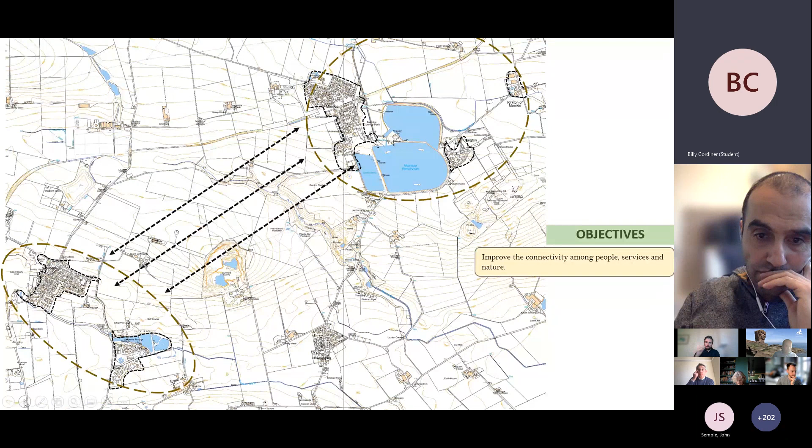Sam's already run through this slide, so our objectives were to improve the connectivity, enhance the relationship with the blue and green environments, improve sustainability of the villages with development and densification strategies, improve sustainability and resilience through the use of solar power, and reduce the monotony you get with developments to try and encourage a range of developers.

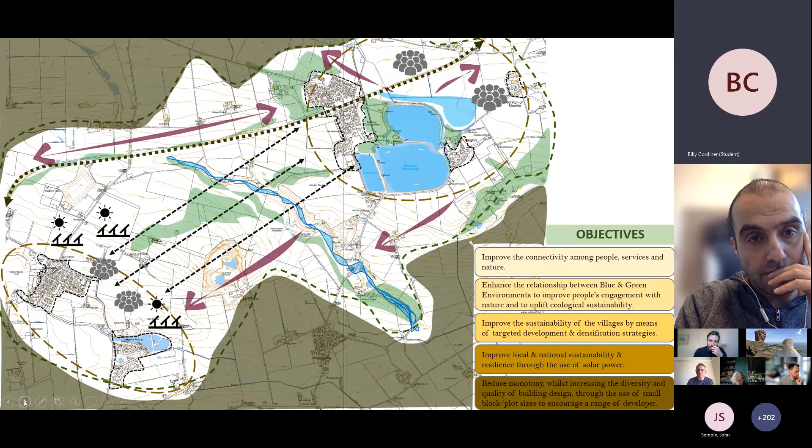And innovative design. So we started looking at demographics, and we also looked at a series of charrettes run by Angus Council from 2014-2017, and it was just the normal issues that arise from those kinds of conversations: people have concerns about health services, infrastructure, access to schools, digital connections, public transport, loss of jobs, and access to affordable housing.

So we ran through a series of analysis on the historical background of the different villages, the vernacular character of them, and eventually we came upon a series of different village building clusters throughout some areas. From there, we filtered it down to looking at creating buildings to create clusters within themselves with semi-private, semi-public spaces that could be within the local environment.

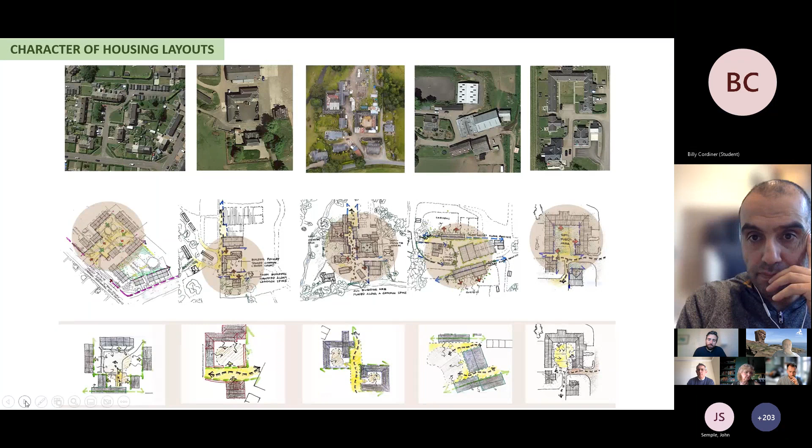Then we wanted to analyse the relationship between the villages themselves, so we looked at 20-minute walking distances. This was calculated from a 3-mile-an-hour walk, taking a 1-mile radius around the village centres, and we wanted to see what kind of connection we could draw with that.

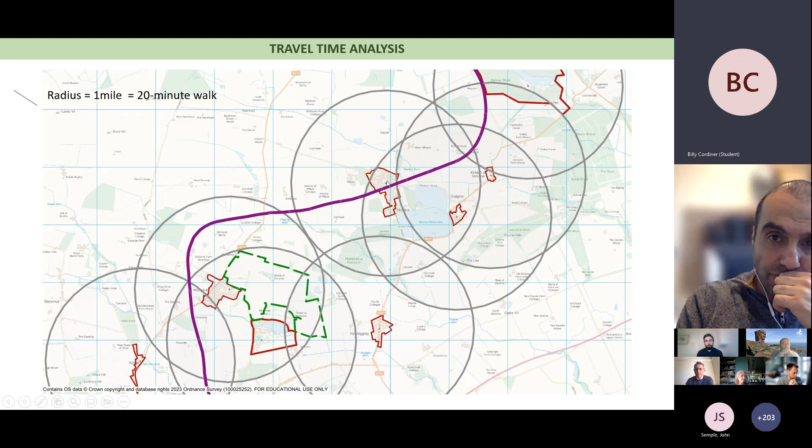The purple line running through is a disused railway line that runs through the whole area. From there, we looked at the intersecting points between all these connections to see if we could come up with 10-minute walking radiuses and what kind of connection that gave us. We got this connecting link between the villages running alongside the disused railway line, which creates a kind of spine to the whole area.

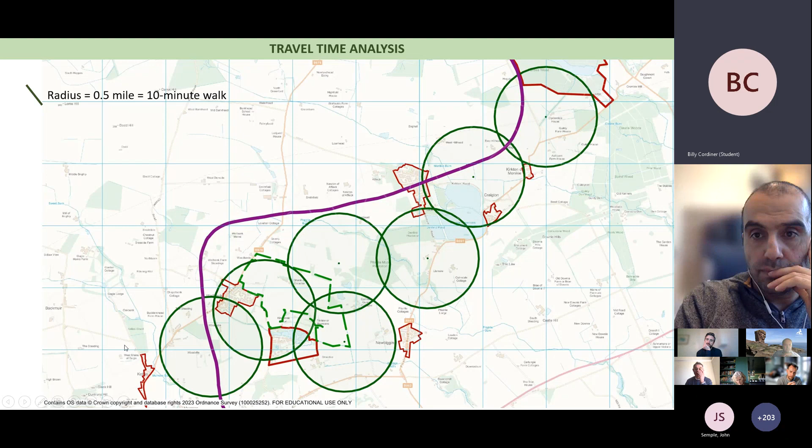From there, connecting these up, we got a distance between the furthest reaches of those radiuses of 5 miles, which is around about a half-hour to 40-minute cycle ride, depending on your fitness, being such that it is uphill from the southernmost village to the northernmost.

What we had noted as well was between the two clusters that we've got forming with the 3 villages in the north and the 4 villages in the south - Kellas, Wellbank, Kingennie and Newbigging - the population in this area was just under 1,000, whereas between Monikie, Craigton and Kirkton, it was over 6,000.

But the majority of facilities were down in the lower southern area, whereas in the north, they only really had one cafe and a school. The schools themselves in Craigton and Newbigging are feeder schools for Carnoustie High School, whereas the school in Wellbank is a feeder school for Monifieth.

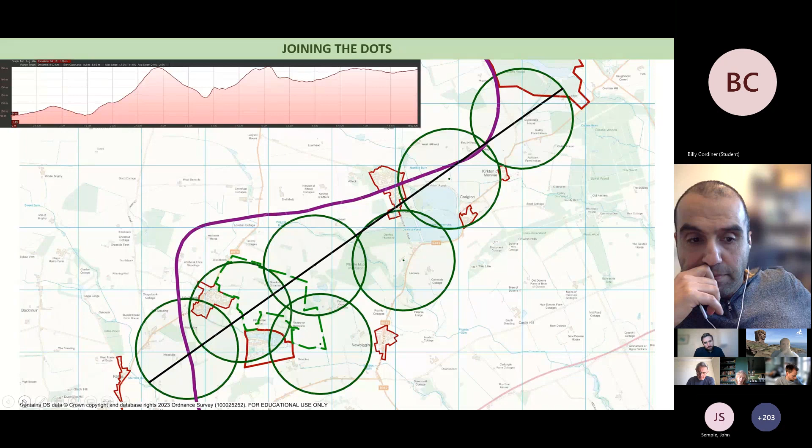So from that, we wanted to look at the existing potential along the spine created by the old railway line, looking to possibly convert it into a cycle track, which has already been done elsewhere in Angus. So we wanted to see the connectivity from that and the potential areas with Monikie Park.

There is another country park further to the north, which is Crombie Park. The green spaces in between, the quarry that is in use just now, and the golf course - looking at all these kinds of development areas and connections, especially from a tourist perspective. What kind of connections can we develop for tourism?

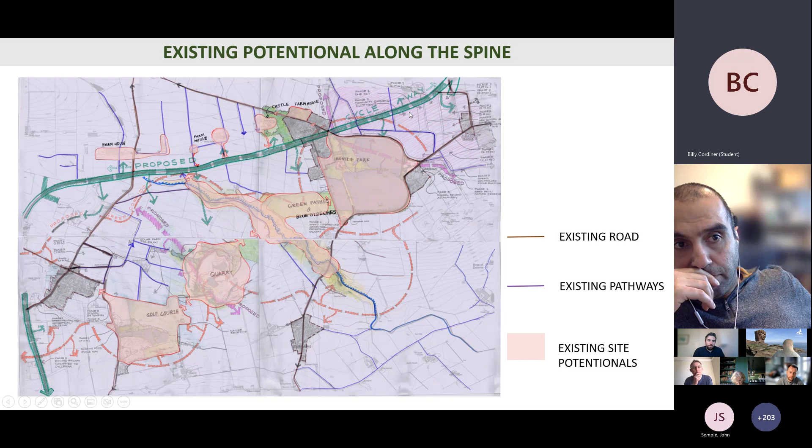From this, we came up with a concept plan for the area, looking at Monikie and the Wellbank area. At first, we looked at what would happen if we did nothing. Then we looked at what would happen if we put all the proposed developments up in Monikie, then what would happen if we put them all down in Wellbank. But we came to the conclusion that the best was a combined sharing of development between Wellbank and Kingennie to the south and the three Monikie villages to the north.

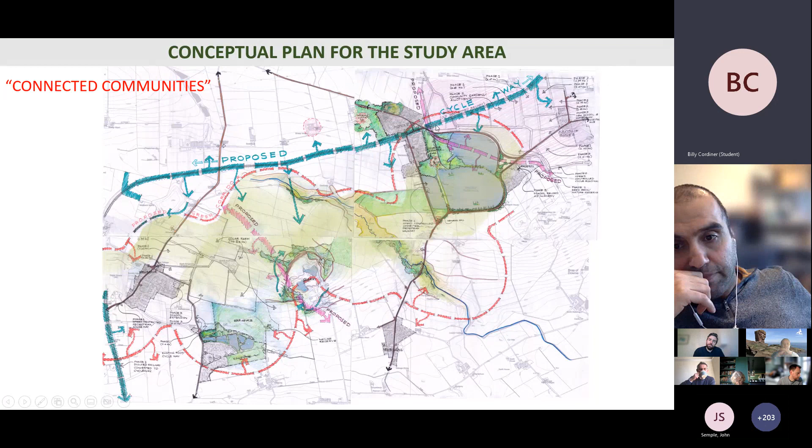This took us on to a proposed development plan, in 3 phases. The first phase would be to start development in Wellbank in 2 development areas, plus building a solar farm. The solar farm itself would cost around 34 million to produce, or you could lease the land out and create an annual index-linked income of 187,000.

Construction of the old railway into a cycle path would commence straight away, and we could have development of country paths between the 2 villages as well. Looking at a nature reserve, in the Wellbank development area we'd have just over 200 homes, and in the Monikie development area, just under 300.

As we can see, that's what it would look like in the bottom right corner here. It's just to give you an idea of the development between all of the villages, with Crombie Park to the north.

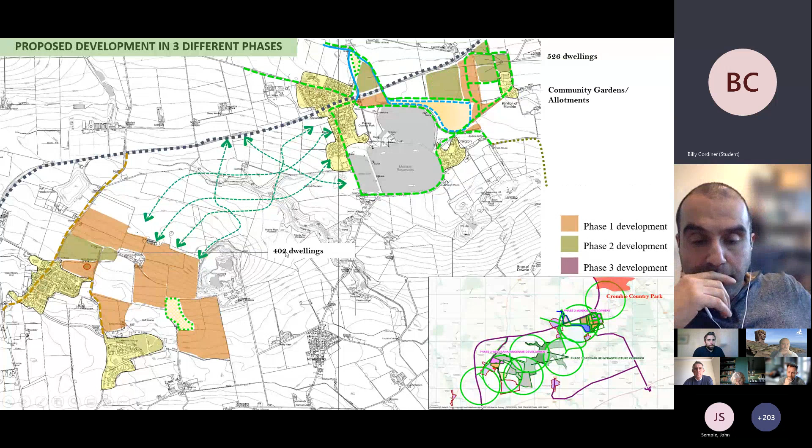Then in the second phase of development, we'd be increasing the number of homes with phase 2 in Wellbank to 402, and increasing the number of homes in phase 2 in Monikie up to just over 500.

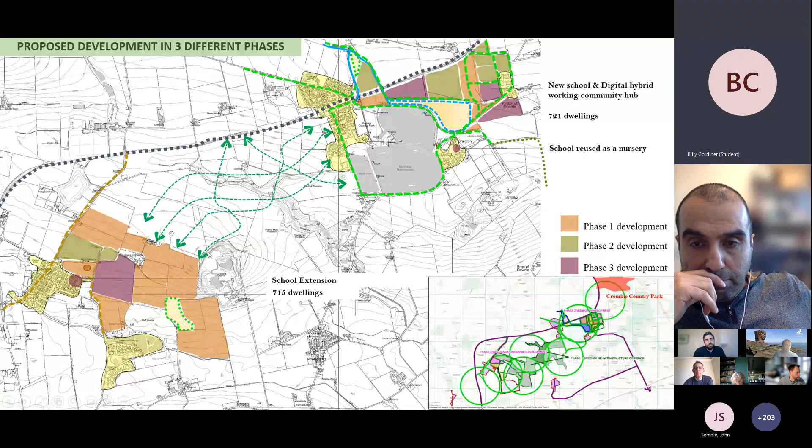Then with a school extension and the nursery and hub being developed after phase 1.

Excuse me, you're going to keep it down. I'm on... Oh, right. Okay. Sorry about that.

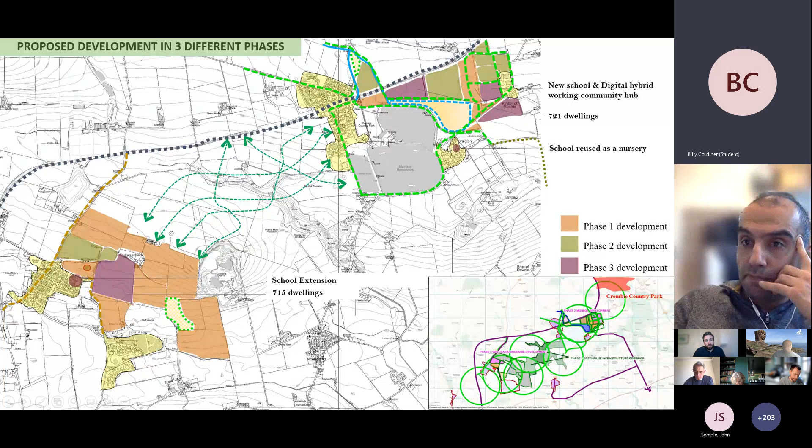So with the nursery developed in phase 1, and then school extension to the existing school in Wellbank in phase 3. Once the population had increased in Monikie, we would look to have a new school and a digital hybrid working community hub developed there, and the old school would be converted to a nursery.

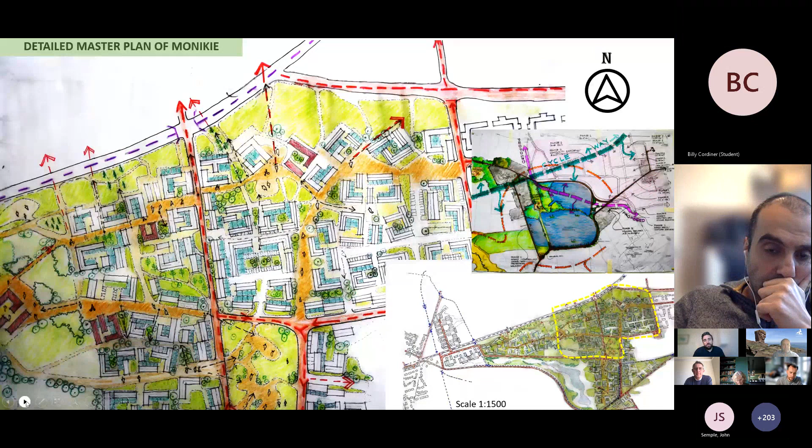Then we looked at the same kind of idea with the concept plan we had for Wellbank, and this time we decided just to concentrate on the phase 1 development area closest to Wellbank, where we had those connections.

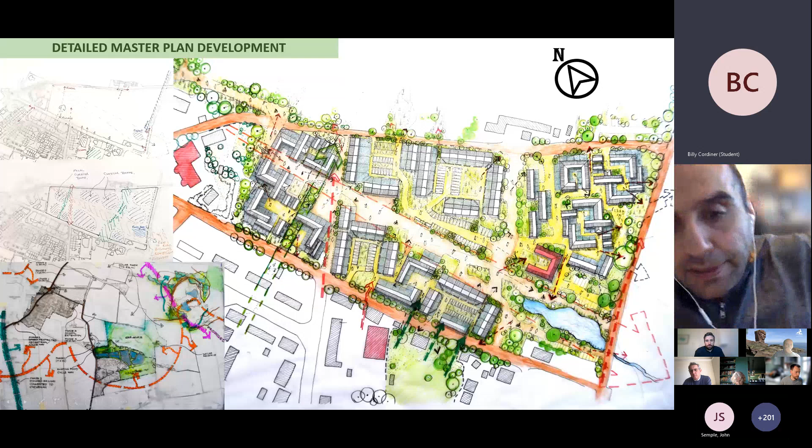From there, we looked at the connections through, and then the areas where we could develop, or where we could put different clusters of housing. Then we drew up a more detailed housing plan with the area of community grounds in between, with the SUDS for some blue infrastructure too.

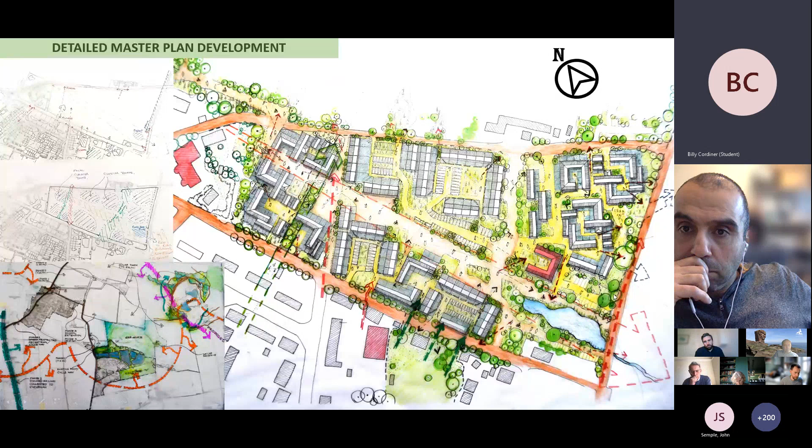We've got that permeability running from the existing development through into the new development, and then carrying on through to the phase 2 development to the north and the phase 3 development to the east. Then we finally drew up some design principles for both developments and applied codes to them.

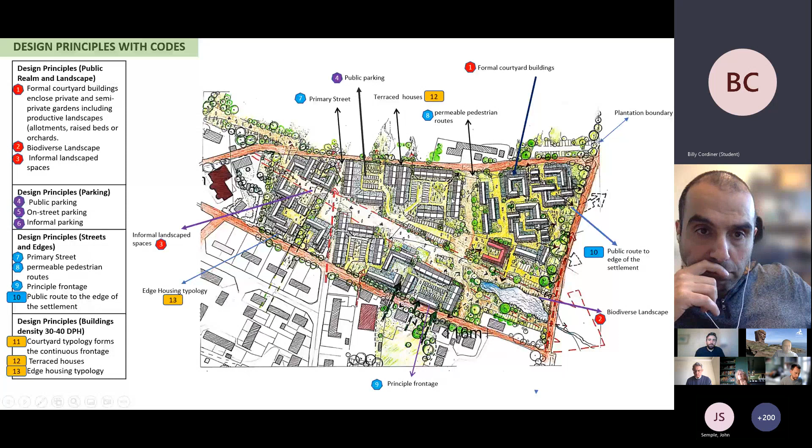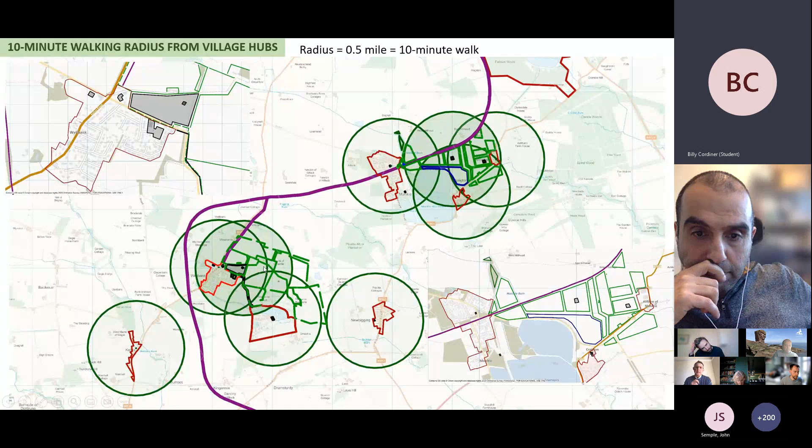So recapping on where we were with the developments, we looked at the existing developments we've got and the clusters that were created. From that, with that 20-minute radius around that, we've created these 2 distinct clusters with that railway line running too, which has now been developed into a cycle path.

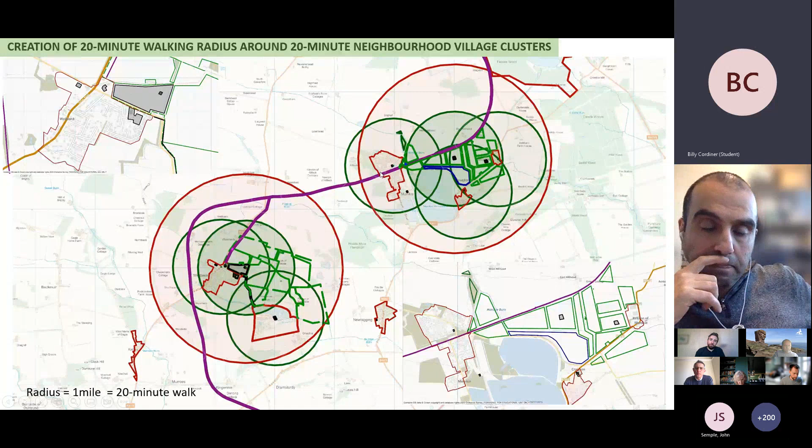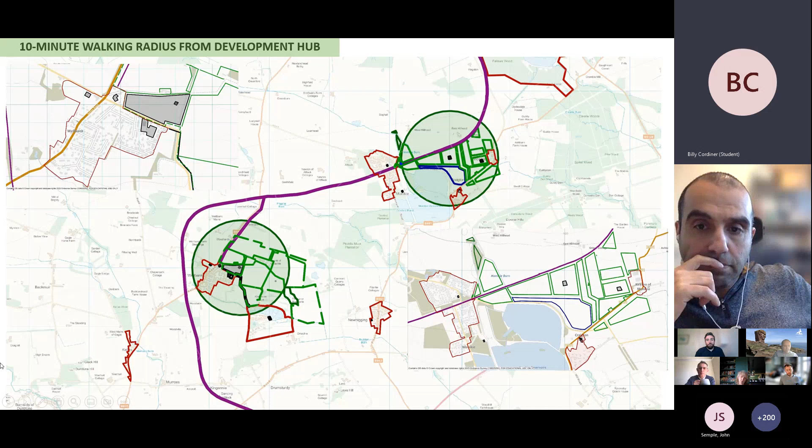So if we look at the development itself, what you would class as a 20-minute neighbourhood, it doesn't quite reach, but it does touch the other existing villages and creates that connection. Then when we take into account, and expand that 20-minute radius all the way around, we've got that connection, and then the final connection with cycling.

So what it goes to show is that to actually achieve this kind of development, we've got to network these villages together. We've got to create these clusters so they can share facilities and then expand on that. But there's only so far people can walk, then they have to rely on their cars. To facilitate further sustainable development, we've got to look for ways of making it much safer for people to cycle between these networked villages.

Finally, if we go back to what people were asking for, with creating the digital hubs, we've improved internet services and access to GPs in both of the areas we've actually developed. Around Monikie, we've got about a 25% increase in the population, and around Wellbank, we've nearly doubled the population with the developments.

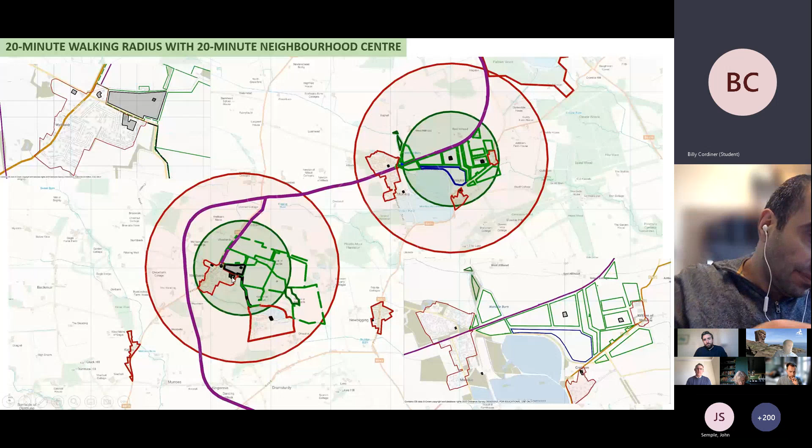But still, in both cases, there's not enough to actually warrant having a GP surgery. Hopefully, with that increased population, there is an increase in local transportation and bus services, which would help people access GP services much more easily.

Affordable housing would increase. If we hadn't done anything, there is a development within Wellbank with a golf course, a hotel, and a couple of hundred houses. But we believe that the development we've proposed, with hybrid working, would bring far more job opportunities with the solar farm, the school extensions, new nurseries, and would increase all the facilities available for people.

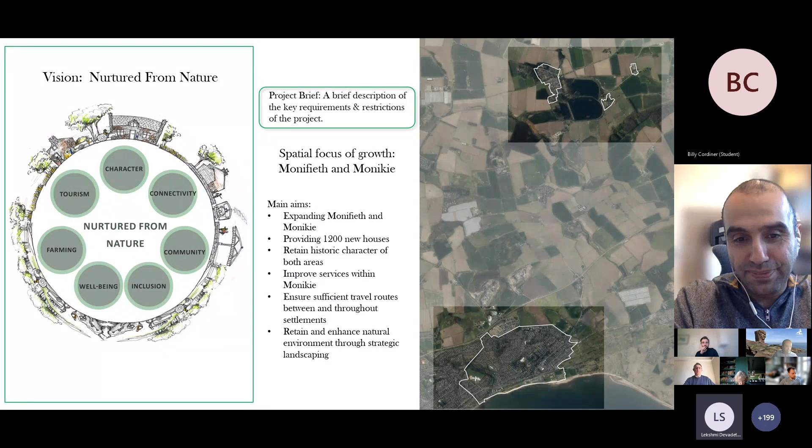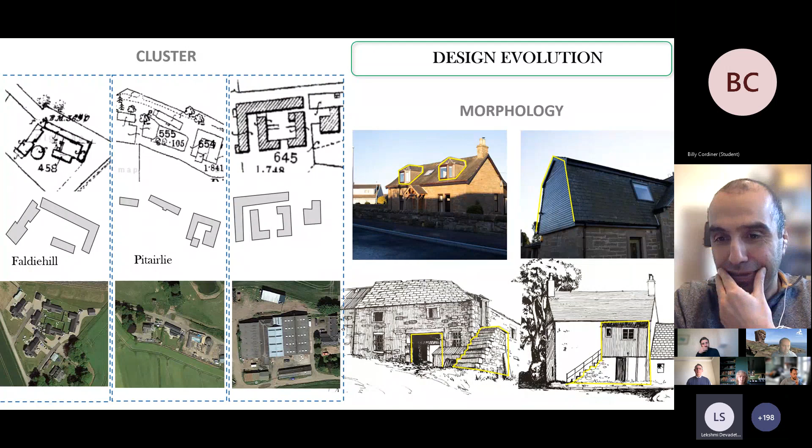With regard to our housing development, our team have implemented a farmstead concept by identifying some historic farmstead elements into our design and integrating traditional morphological characteristics of the existing buildings into our new structures.

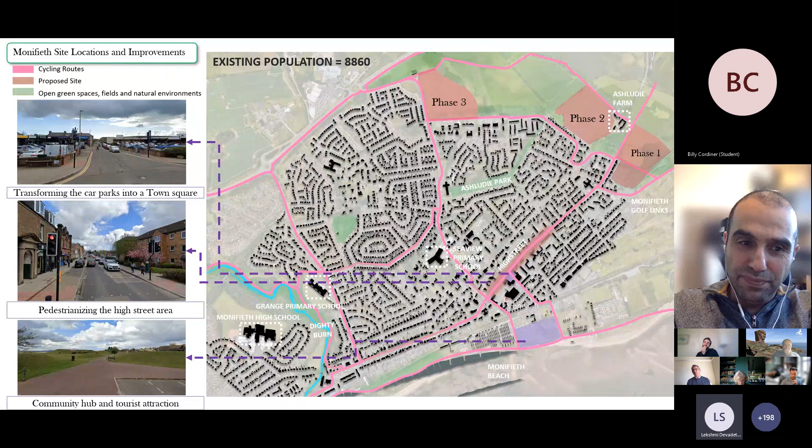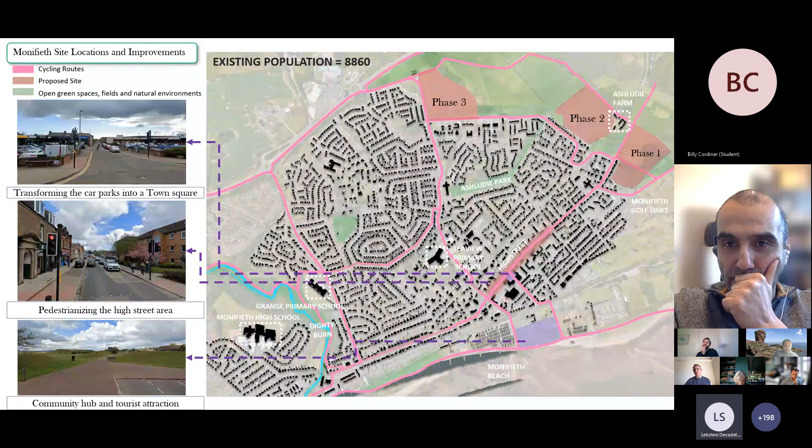In addition to the housing design, we have proposed some development plans for the town, like pedestrianizing the high street, converting the large car park to a town square, and establishing a community hub on the beachfront, which could boost tourism activities. The identified locations are within a 20-minute distance from the existing facilities and our high street. This is our site.

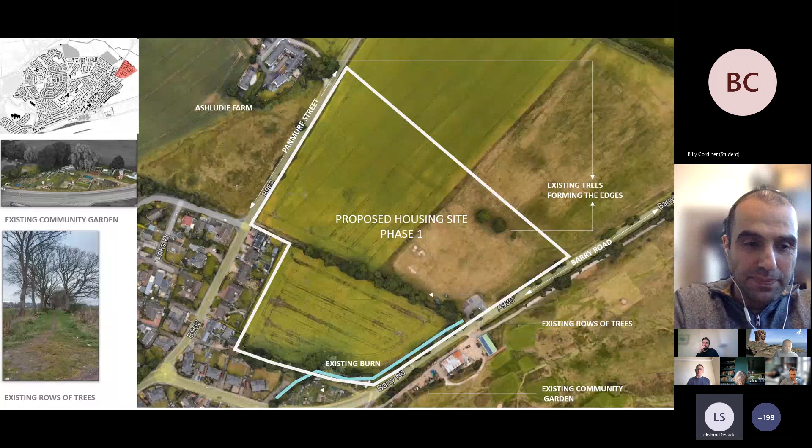So we try to execute the development of phase 1 site, incorporating our innovative concepts and ideas, making a significant milestone in the progression of the identified sites, as it lays the groundwork for potential future developments.

This site is strategically located in close proximity to the Ashludie farm, situated between Panmure Street and Barry Road, and conveniently borders an existing community garden. Our site features an established community garden and a pedestrian path adorned with 2 rows of trees that interconnect both the routes and have an existing burn.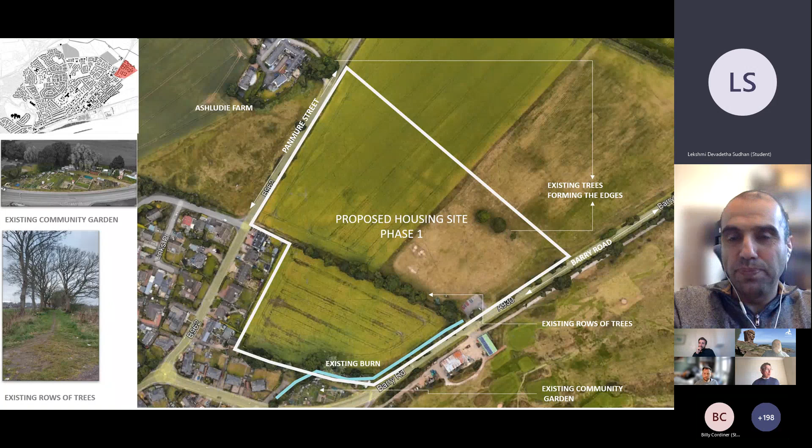The perimeter of the site was delineated by linking the extant trees situated along the boundaries. Here we have the figure and ground plan for our design, which illustrates the existing community garden and its extension in our proposal, along with an open community market.

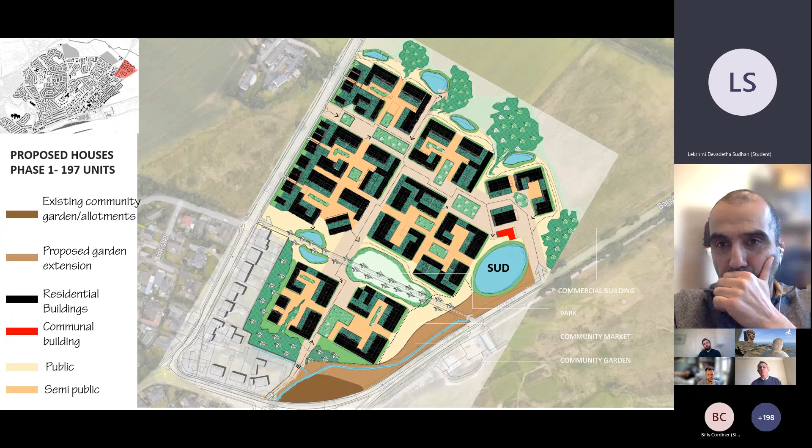Our site has a flat nature, and it is prone to flooding due to the proximity to the burn. To mitigate this, we have proposed the implementation of a SUD along with the commercial building as the focal point of our site. We have also aligned the clusters and created a primary access way that could direct attention towards the central point.

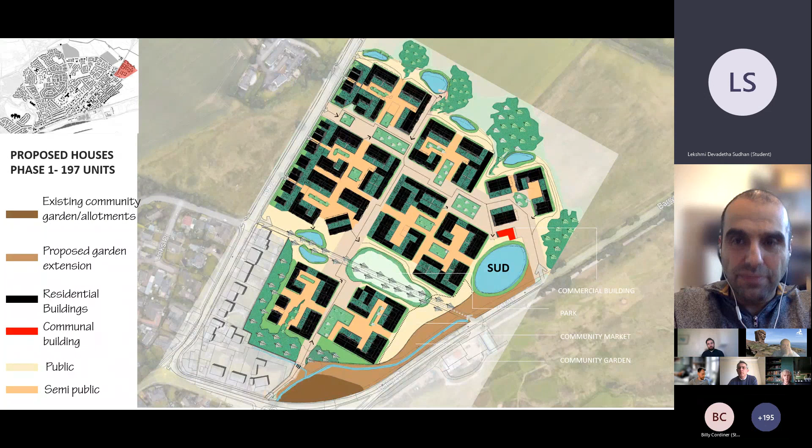The areas between the clusters are designated as semi-public spaces, while the inner houses have private gardens and the outer ones have common spaces. This is a 3D that shows how we have designed our site.

We have primary site connections with particular emphasis on the common building for services, denoted by the red color. The building provides a variety of facilities such as supermarkets, restaurants, and administration space for the garden.

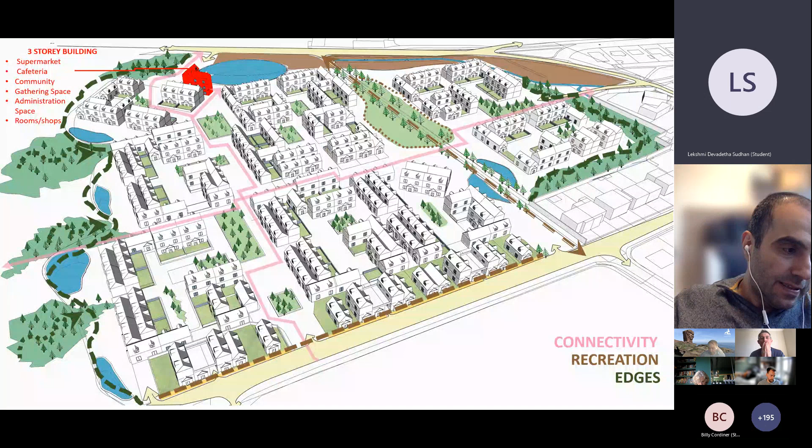Additionally, the edges of the site incorporate green and blue integrations, while the edges interfacing with the existing buildings feature green buffering. We also have a neighborhood park incorporated along the existing rows of trees, which could enhance the site's overall aesthetic appeal. We have also done a design on the type of houses.

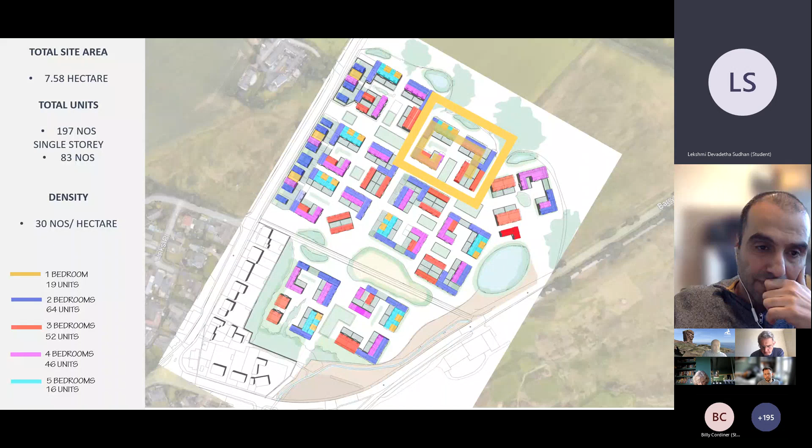So we have information providing the number of units and bedrooms for each offer. The land area spans about 7.58 hectares, with a total of 197 housing units developed by us, along with an additional commercial block. That's about 30 units per hectare.

To summarize our design in Monifieth, we have a shared path connecting both roads, another shared path linking the northern green area to the southern neighborhood road, an upcoming expansion of the community gardens, two separate access points for pedestrians and cycling, green and blue elements, and neighborhood park.

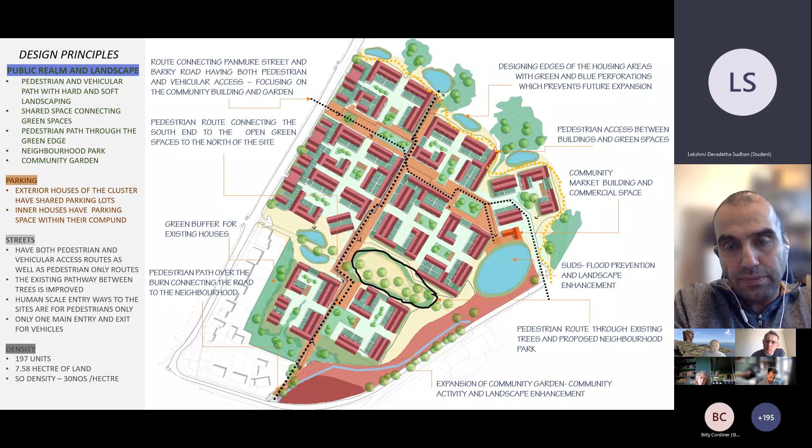Based on the 20-minute neighborhood concept, we identified existing facilities such as shops, educational institutions, and religious spaces within a 1-mile radius of our proposed housing site. Additionally, we have proposed provisions for shops, cafes, and community space within our site as well.

As per our research, the current ratio of 1 medical practice per 10,000 people may not suffice for the projected population increase after completion of phases 2-3 in Monifieth. Therefore, we are planning to propose a new GP facility in our other proposal in Monikie, which could relieve the potential pressure on the existing medical practice in Monifieth.

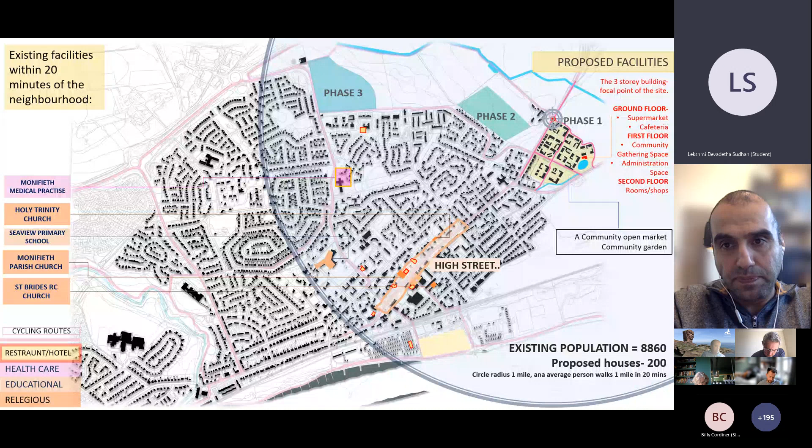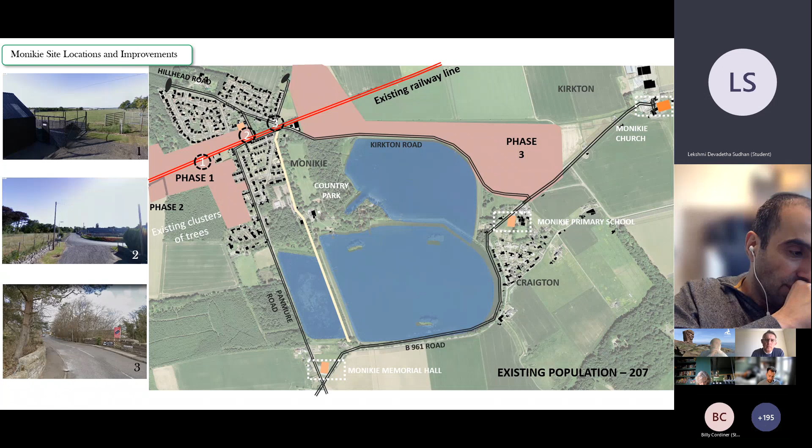But Monikie already has an established country park, a school, and a community space, and we intend to improve the overall quality of the location. Also, on the sides of our site, there are existing clusters of trees that serve as a natural boundary formation, which we have managed to integrate into our property.

This illustrates the proposed structure and caliber of the interior spaces, alongside the communal gardens and buildings depicted in red. Also, our design endeavors to seamlessly integrate the pre-existing green and blue elements into our proposed plan.

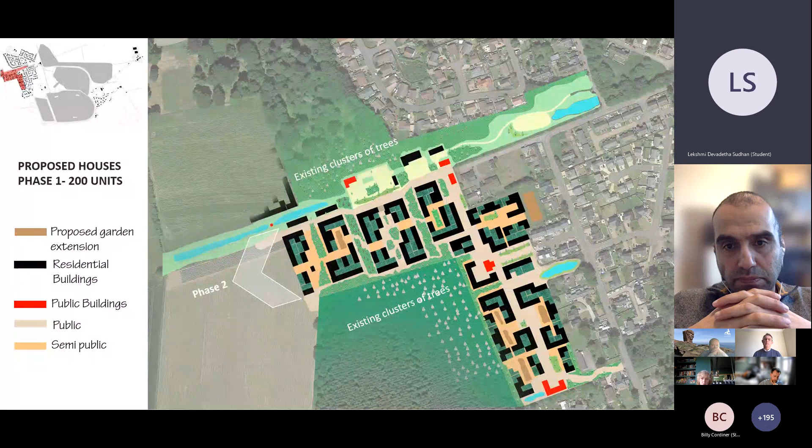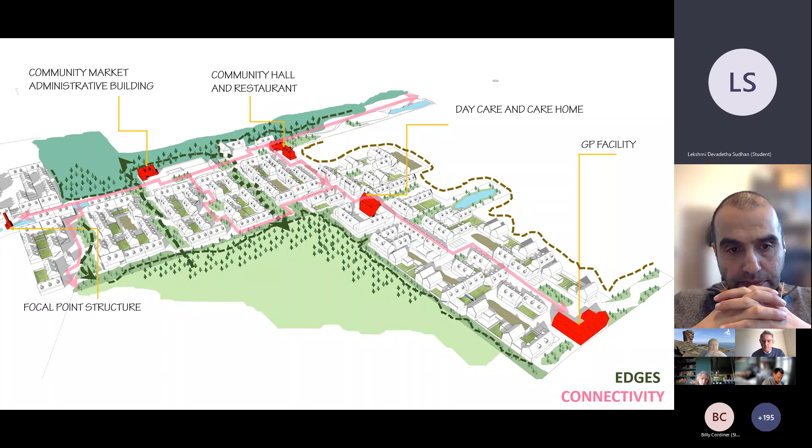These are the perspectives of the suggested places, based on our concept.

Monikie and Monifieth are two distinct locations with different amenities. Monikie in particular has a limited range of services, with only one cafe within a 1 kilometer radius. To address this deficiency, we propose the implementation of a community garden, community market, multiple supermarkets, a variety of essential retail establishments, and a medical facility.

We hope this medical facility will serve not only the residents of Monikie, but also those in the nearby areas of Wellbank and Newbigging. If we were to incorporate the proposed development plan for Monifieth into an existing area, we envision creating an active and vibrant hub that would benefit not only the immediate neighborhood, but also the surrounding communities.

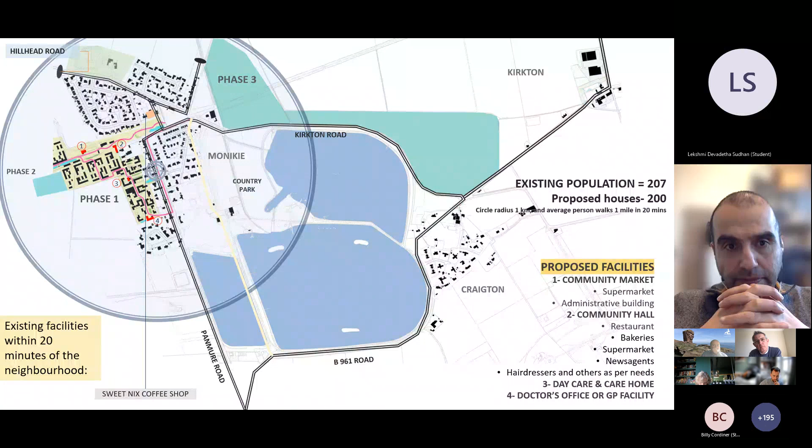Children can benefit from a safer route and designated areas for recreational activities, while dog owners can benefit from neighborhood spaces designed for walking and biking with their pets. For adults, our design provides community spaces for closer connection and social interaction, and older individuals can benefit from user-friendly spaces that promote socialization in diverse environments.

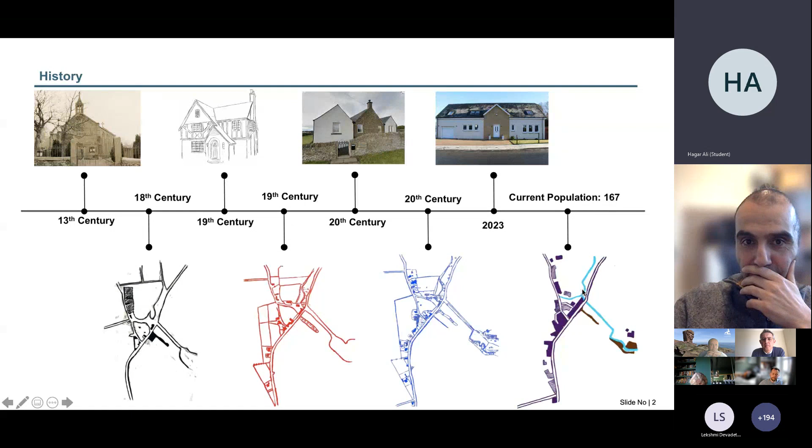As we can see here, we have a timeline of how Kellas has evolved through the years, and we can see how the houses have developed along the road. Now the current population of Kellas is about 167 people, with about 40 or 42 homes.

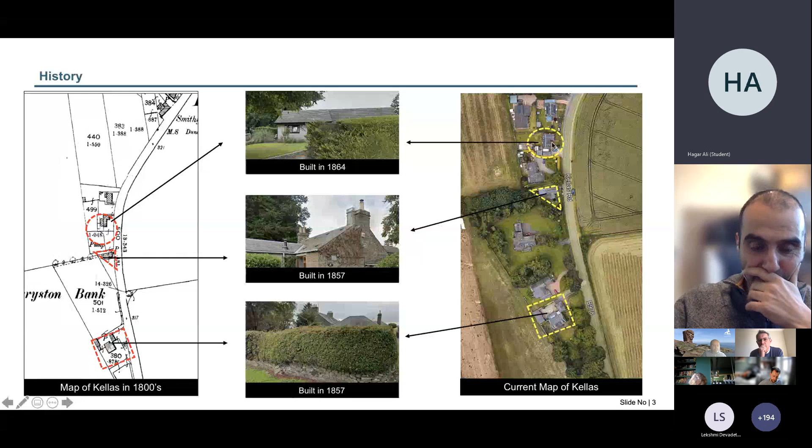We also looked at some historical buildings in Kellas. We found 3 houses that were built in the 1800s, and here we have them compared on the other side. There hasn't been many changes, just some extensions added to these houses.

Here we go to some of our aims and objectives for this project. We really want to do this as an eco-village, meaning sustainable local food production, a self-sufficient community, and a wide range of homes with affordable options and connectivity. Not just between Kellas and nearby villages like Bucklerheads or a city like Dundee, but also connectivity between the current development in Kellas and our site, and connectivity within our site as well. Finally, landscape, meaning the preservation of on-site natural ecosystems.

We've also looked at some policies that we found very relevant to us. We looked at the rural planning policy to 2050. One objective that caught our attention was the need to take into account the assets and opportunities that the area can provide, and that's what we did with Kellas. Also, one challenge that caught our attention was how to make rural areas livable, so what can be done to achieve that. We also looked at Angus Council design requirements, since we are planning in the Angus area.

Here we have looked at some case studies that have helped us. One book we really liked was The Anatomy of the Village. We noticed 3 villages that we took some inspiration from for our master plan and our ideas: Gainford in Durham, Milburn in Cumbria, and Coxwold in Yorkshire.

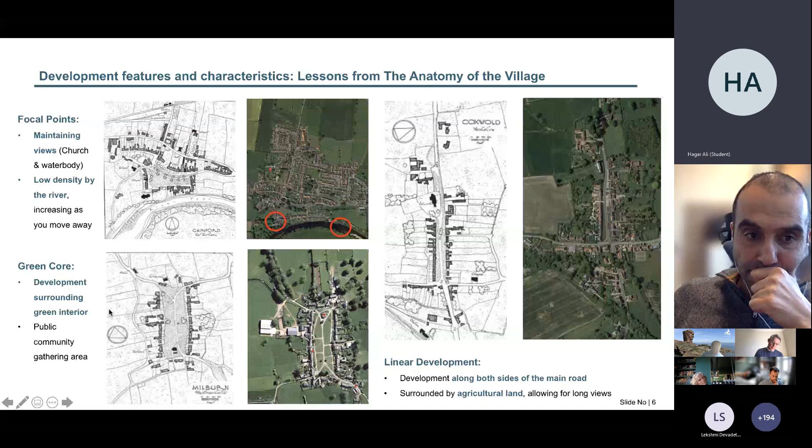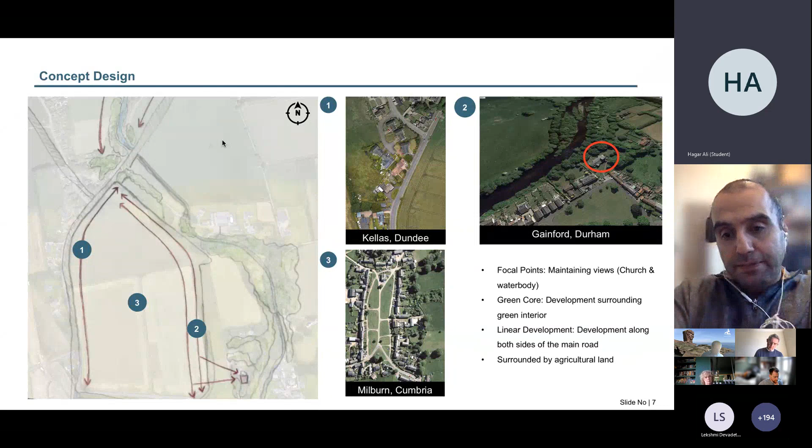Here we have our concept design. This is the very early stages of our design process. Here we have the proposed site in Kellas. We have 3 parts; how we divided the site was in 3 parts, each taking inspiration from certain areas.

The first one, we wanted to do a street village along the road, so a linear development. This was taken from Kellas itself and how it developed along the road through the years.

Then here we want to do development along the burn and the church over here. This was taken again from Gainford, Durham, where they maintained views of their assets.

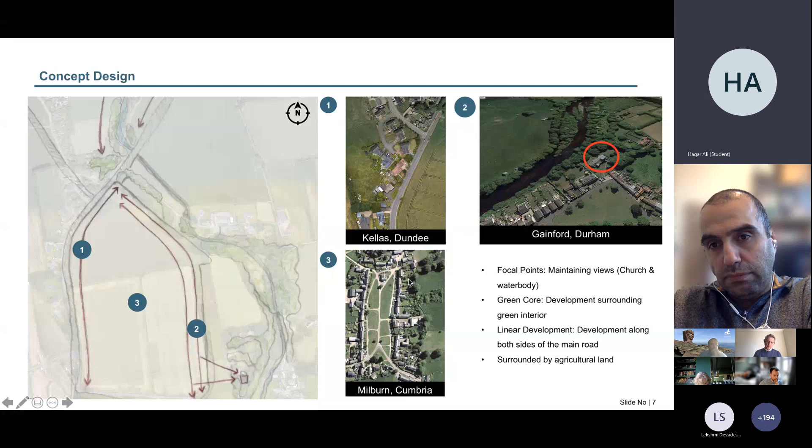Finally, we want to develop a green core in the middle. This was taken as inspiration from Milburn, where they have a green core and houses developed around that core.

We were previously asked for 900 homes or more in the brief, but unfortunately, because of the size of Kellas, we decided to stick with 329 units, just to preserve the rural feeling that Kellas has. We think if we increase the density, it might ruin that and take away the identity that Kellas is famous for.

So we wanted to, in the future, implement our idea of extending green corridors to other areas of Angus, like Wellbank or Forbes of Kingennie, or Newbigging, like we did between Kellas and Bucklerheads, which will be shown later in the master plan.

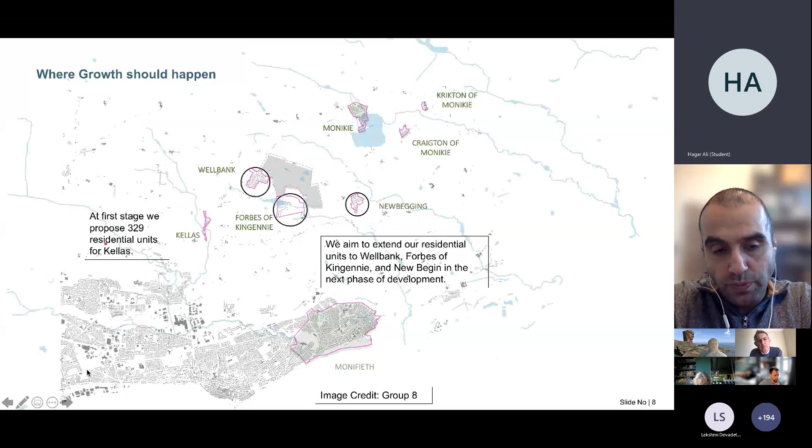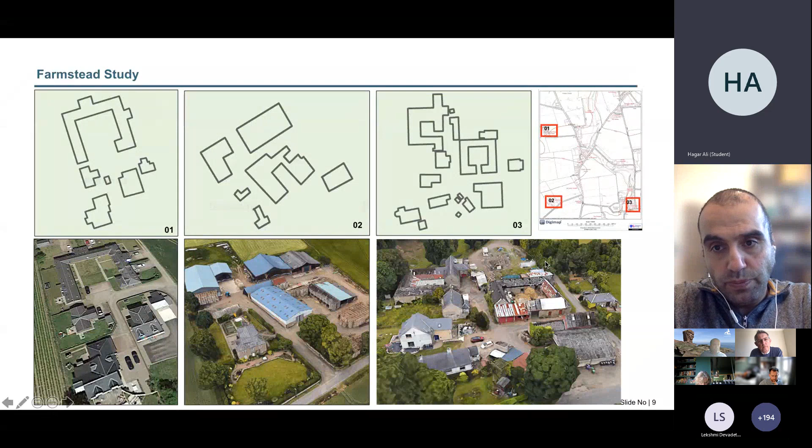Now, we looked at 3 different historical farmsteads surrounding Kellas to use the cluster layouts to help inform the design as a way to increase density while also maintaining the character of the area.

Here's a more zoomed-in version of the 2 farmsteads to see what makes the area unique. What we really liked about these farmsteads is how they used enclosed courtyards to make semi-private areas, and their orientation to create private and semi-private spaces.

Now here on the right, we have the West Mains of Gagie farmstead. It was actually converted into a 4-unit building. This shows us the demand for this kind of housing and the opportunity to use this typology to develop new housing in the area.

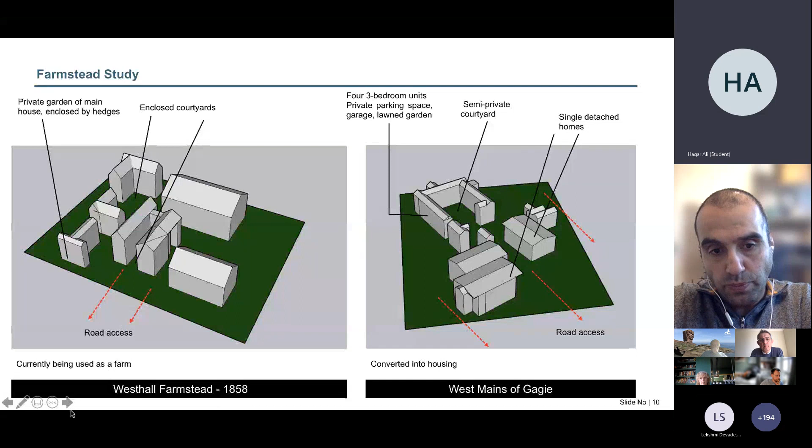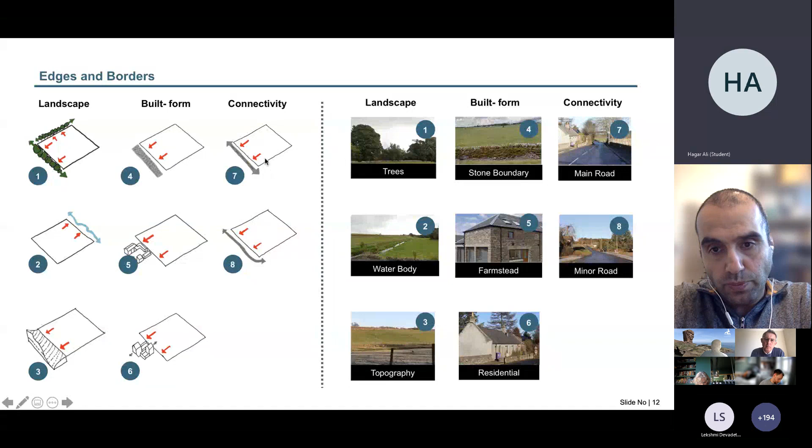We also looked at a book called Buildings of the Scottish Countryside. This helps us visualize the characteristics the buildings or homes might have, like types of roofs and chimneys, which helped us visualize how the houses might look.

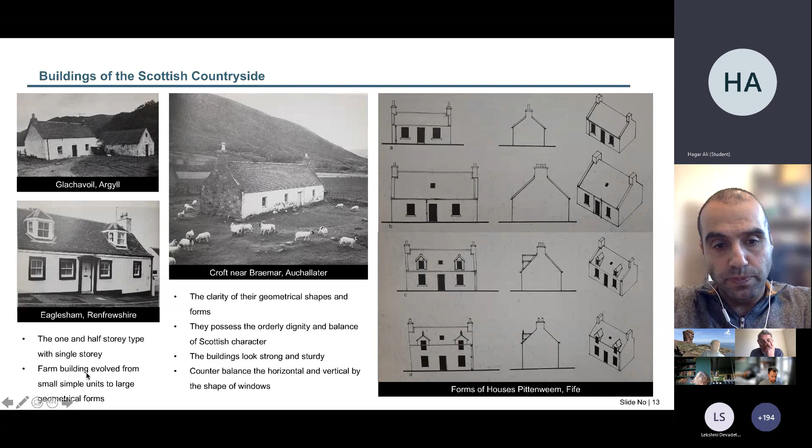As we said before, there is low connectivity in Kellas right now. There is only one bus stop, and the buses only run 3 to 4 services a day.

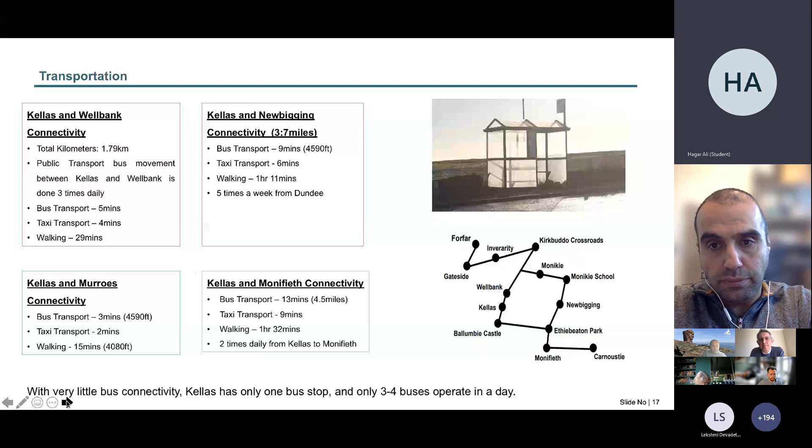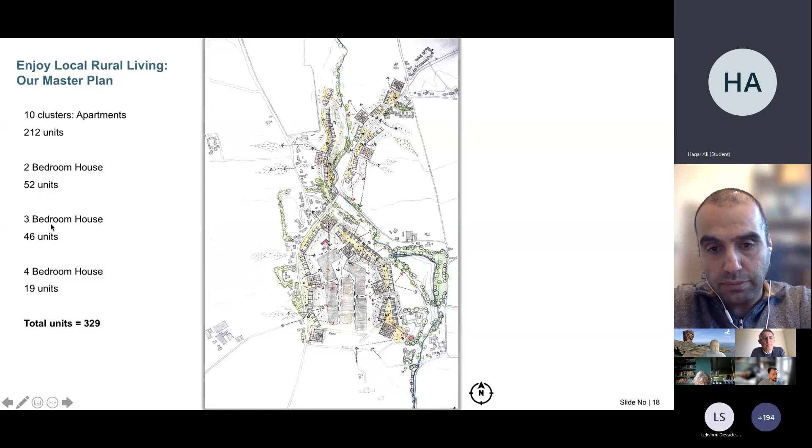And here is our master plan. We want to enjoy local rural living. We created 10 clusters: apartments, 2-bedroom houses, 3-bedroom houses, and finally 4-bedroom houses, with a total of 329 units. We wanted also to look at some sectional elevations, just to give us a feel of how the houses would look with the topography we're dealing with.

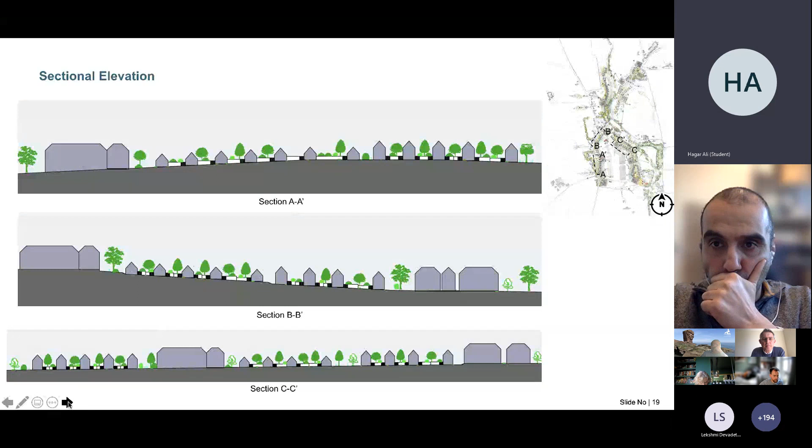They're very similar to the ones in Kellas right now. They have their private parking and private gardens as well. The first phase utilizes the already existing road, reducing the effort needed to create a new one. It's also set back a little from the road with green space, and is lower density than the following phases, just to minimize visual disruption to existing residents.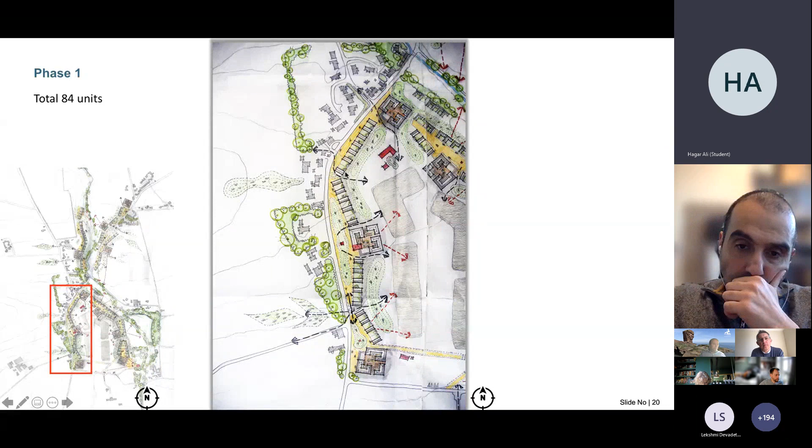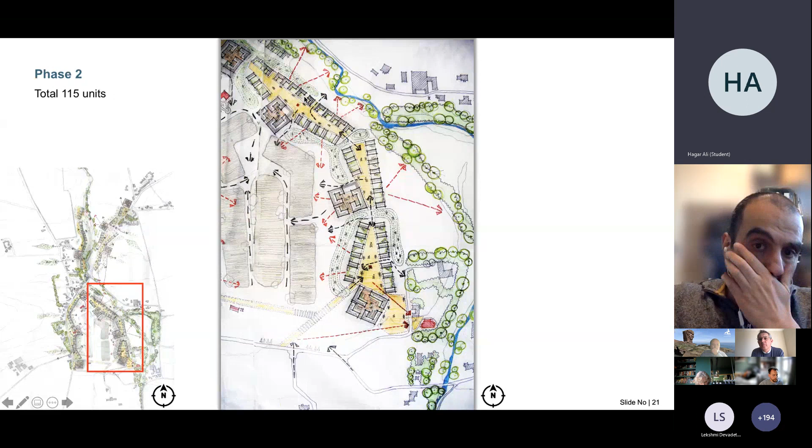We have here a new typology of housing: L-shaped, inspired by the types of housing in Bucklerheads. Here we want to utilize the assets of the burn, the greenery, and the church by maximizing their view, again just creating an enjoyable place for people.

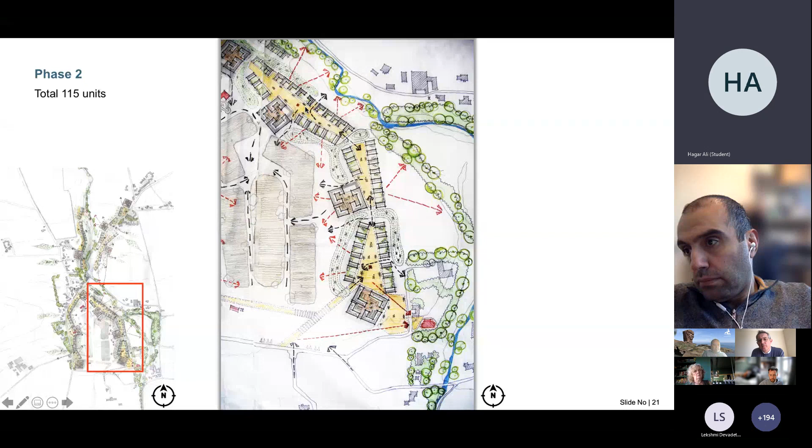The area surrounding the church up to the top is a conservation area, that's why we haven't developed much here. We've also wanted to set the houses back a little bit just to consider future flooding possibilities.

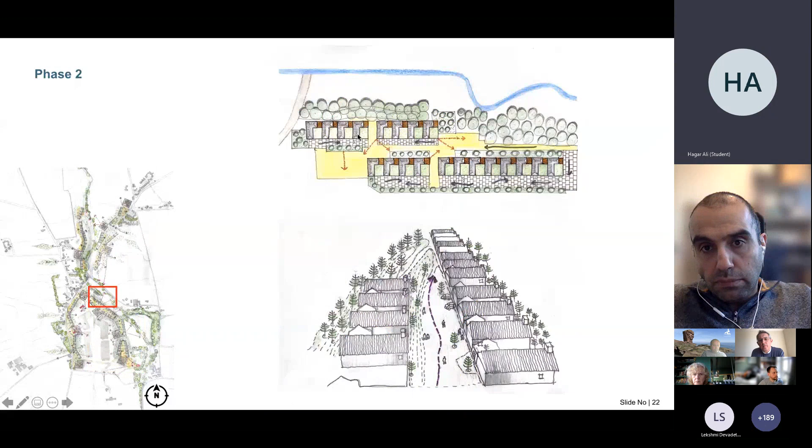Here is another view of the houses along the burn. You can see here the private parking spaces we're proposing, and just another view of these houses over there.

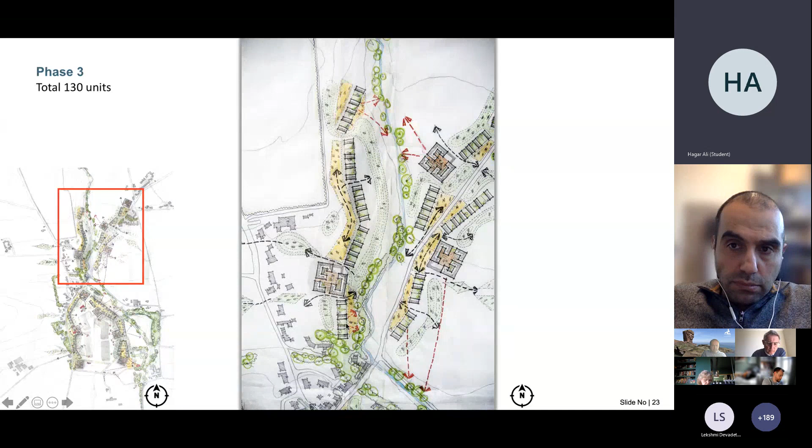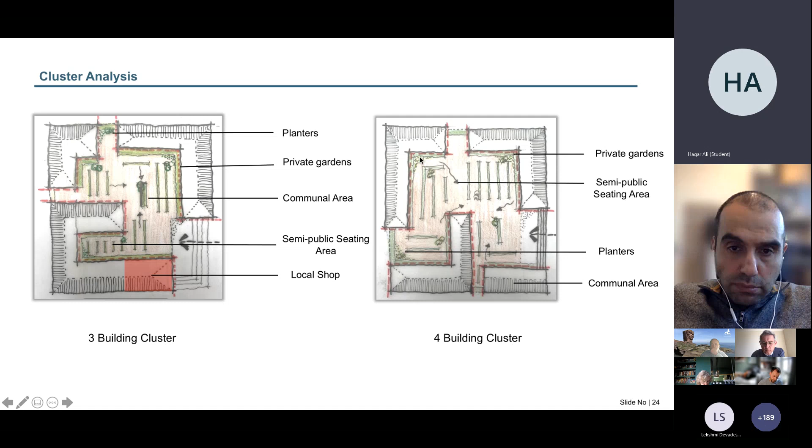Here's a more detailed slide about our cluster analysis. This is one of the clusters that was shown in phase 1. Here we have private gardens, semi-public seating area, communal area, and just planters.

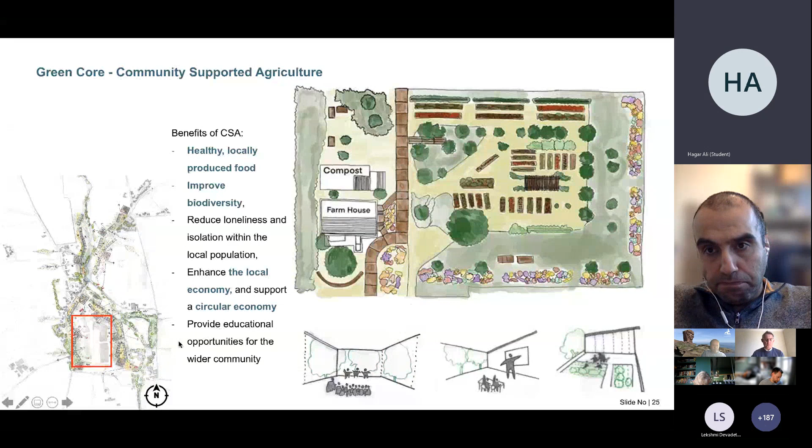We also want the core to be somewhere food is produced, as well as a place for the community to gather and learn about agriculture and ecology. Some facilities that would be included are a community hub where remote work can be done, community gathering and classes, and also a cafe, a tool share, and a farm stand to sell local produce.

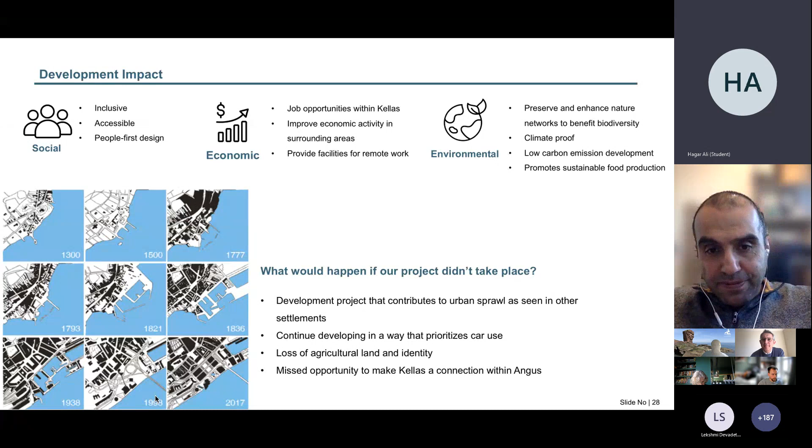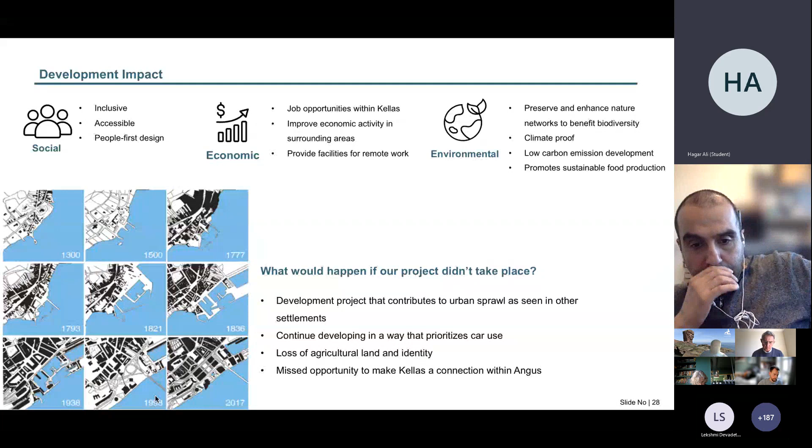Finally, we wanted to ask ourselves what would happen if our project did not take place. We think this would contribute to urban sprawl as seen in other developments like Dundee or Monifieth. It could continue developing in a way that prioritizes car use. Kellas would lose the identity it has, with loss of agricultural land, and finally miss the opportunity to make a connection within Angus. Thank you.

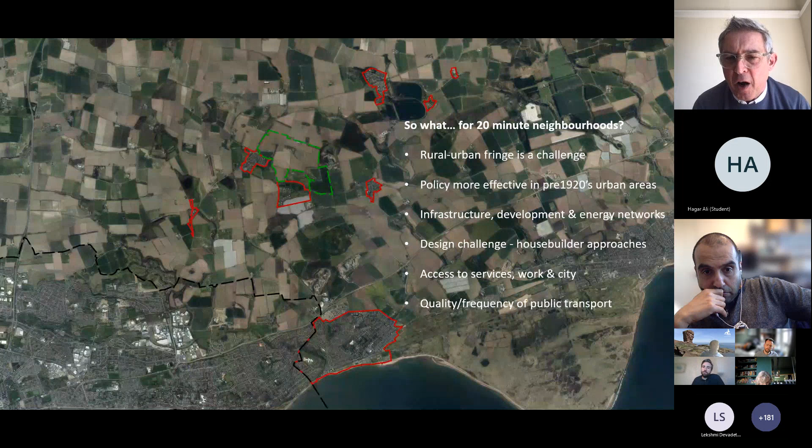One of the key issues that we came across, and many of you who either live or work in rural areas are fully aware of this, particularly if you're away from the main road, bus and train routes, is access to services. There are schools, a certain level of shops and so on, but it's pretty basic in these areas, and you heard the same about the bus service. People will want to go to the big city for nights out, for culture, for shopping, but also for things like hospital appointments and for education. So there's an issue about movement and access to higher order services.

There's no doubt that people need access to particularly public transport, even if in some places that might be a community bus rather than a normal service bus. Anthony, if we just go to the last two, please.

We have to be honest in terms of the policy and approach, that in rural areas vehicles generally will be needed and traffic will be generated. What I thought the teams did very ably was look at cycling and walking options to get to local services, to get to local leisure and facilities as best they could. But for many people, including those who aren't able-bodied, they will still need vehicle access in some form.

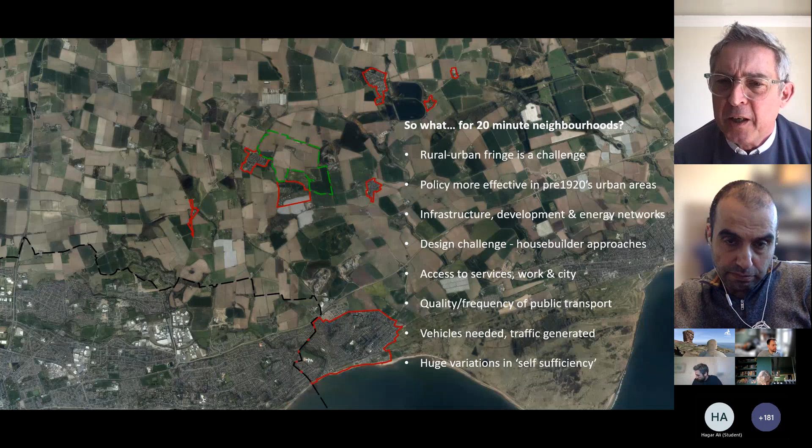So what we saw across the model is a huge set of variations in the self-sufficiency of the settlement and settlement size. I think that applies particularly to people with younger families in the households who need to get to creches, to schools, maybe to play sport, whatever it might be. So there are a whole range of issues there that are slightly different and perhaps easier to provide in the larger settlement of Monifieth.

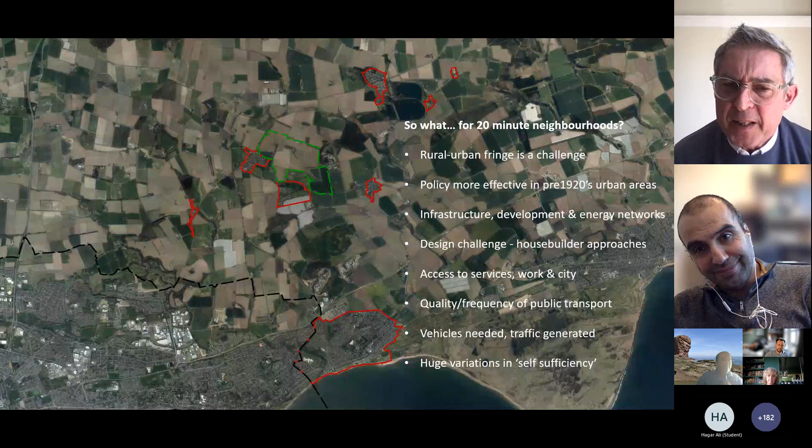So I hope there's some themes there to explore, but I think we'd certainly endorse what Irene was saying at the beginning about living locally - it's about giving people positive choices. I know, because I also work in Oxford, how toxic the anti-20-minute conspiracy theory people are on this, and it's hugely controversial now, something that was meant to be very supportive of local communities. But it's certainly easier in bigger and more intense urban areas, and it's a bigger challenge elsewhere. But it doesn't mean, because of that challenge, that we should give up.

So thanks, well done to all the students. I think you did great work in this in really challenging circumstances.